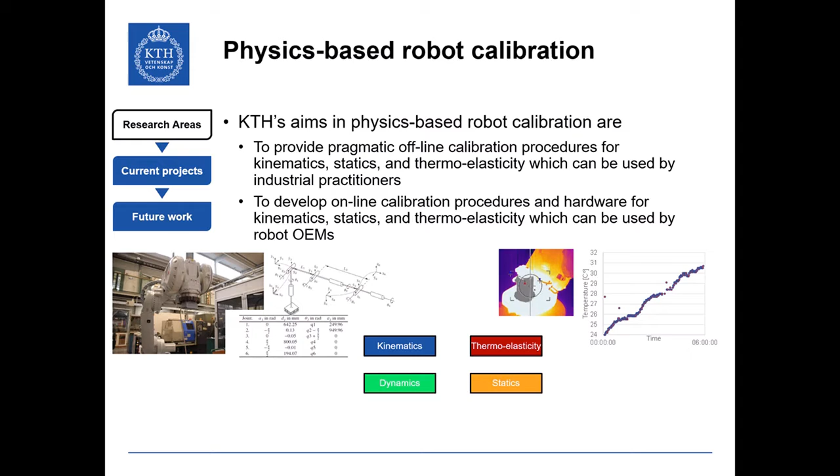Then there's thermoelasticity, the study of how aspects such as kinematics, statics, and dynamics change as a function of temperature. The picture on the right-hand side shows how we have visualized the temperature gradients and measured the temperature of a certain link of the industrial manipulator, in order to compensate the kinematic parameters of the manipulator for the temperature resulting from its task program.

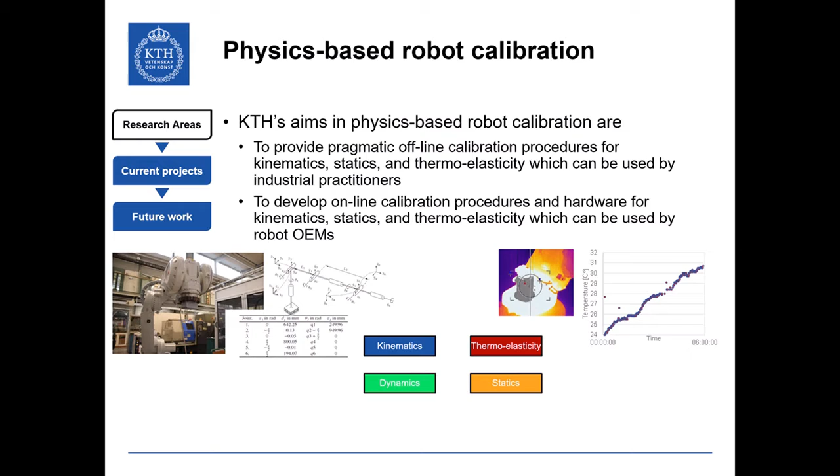Our main focus, though, is the interaction of the industrial manipulator with its environment in static, quasi-static, or dynamic applications. This video shows some of our measurements conducted in 2018 at ABB, and you will see a similar procedure demonstrated by my colleague Monica, which focuses on the calibration of the industrial manipulator's compliance under motion.

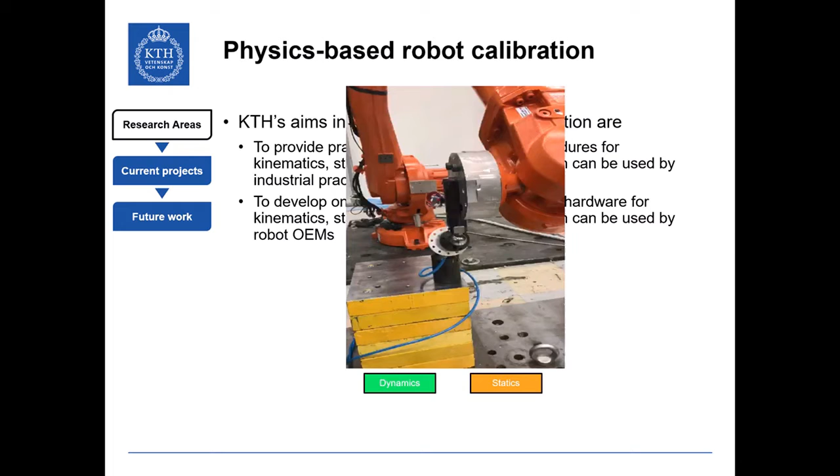Let's turn to the demonstration.

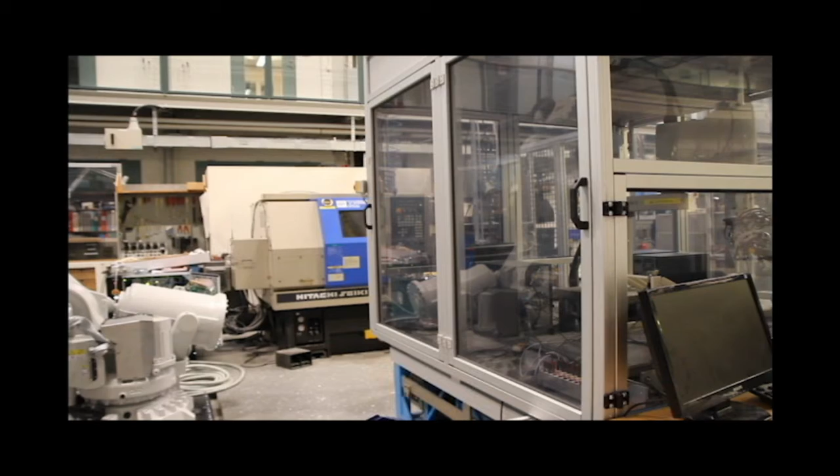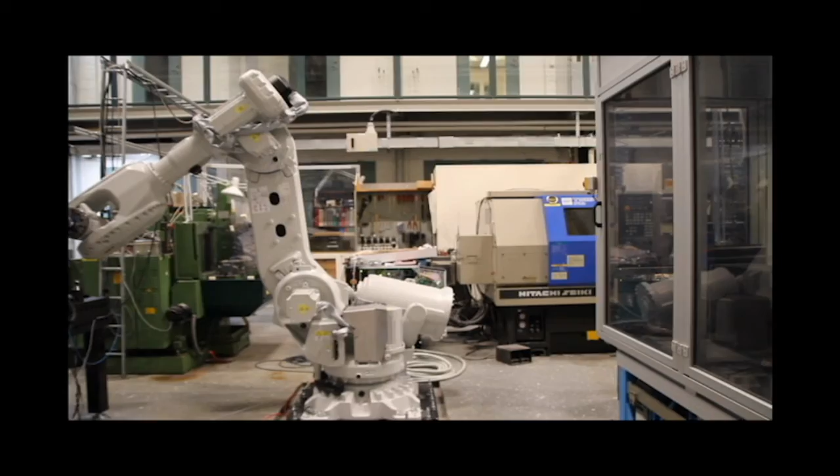This demonstrator is part of an ongoing effort to develop an online compensation algorithm for improving the positioning accuracy of industrial robots in machining operations, where they are subjected to significant loads due to interaction with their environment, while having to maintain tight geometric dimensions and tolerances.

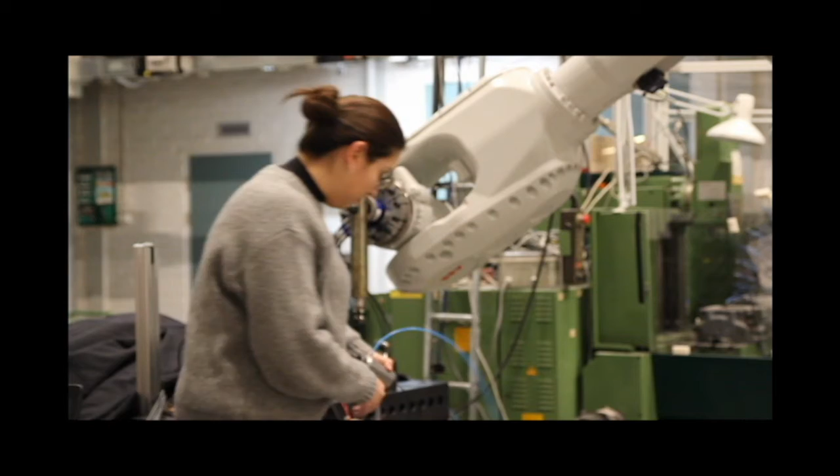The setup presented in this demonstrator is comprised of the robotic system, an IRB 6700 ABB robot with its controller, and the loading system, an LDBB—a loaded double ball bar—a device used in performance evaluation of machine tools with integrated capabilities to apply static loads and measure distances at micrometer accuracy and submicrometer precision.

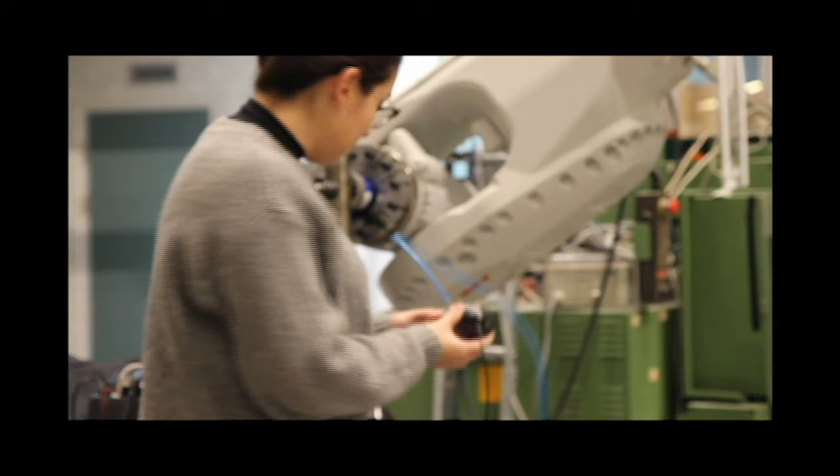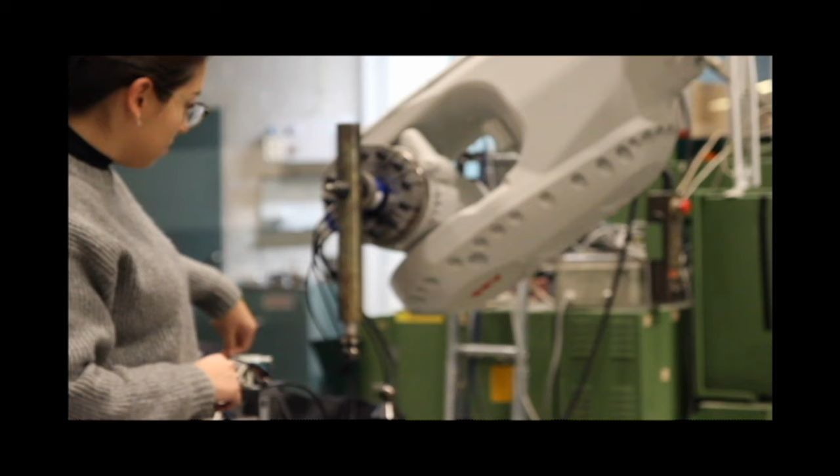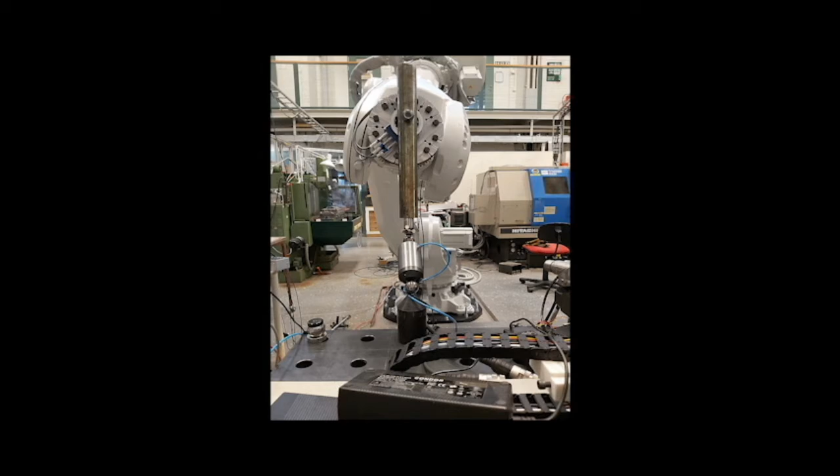The forces are measured using an HPM force-torque sensor mounted on the robot's end effector. An LVDT, embedded in the LDBB, and a Leica AT901 laser tracker are used for validation. Finally, the compensation system collects data from the sensors, performs signal processing, computes the respective compensation that must be applied based on previously identified physical properties of the robot, such as the Denavit-Hartenberg parameters and joint stiffness values, and communicates the values to the robot controller to perform the compensation.

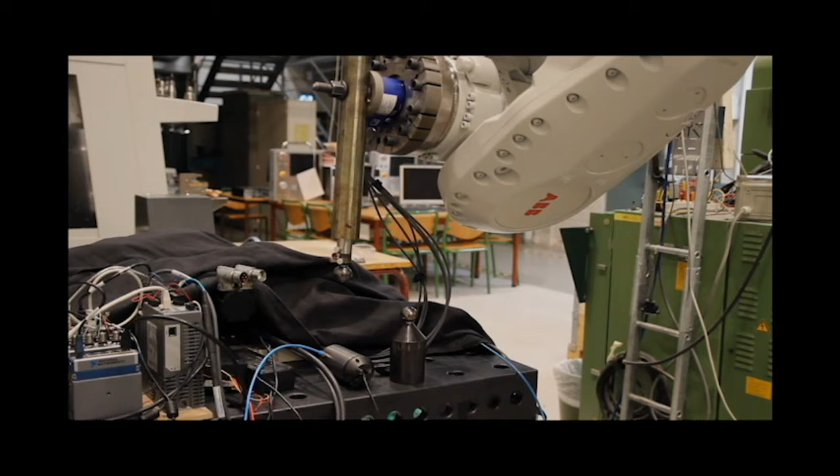For the demonstration of the online compensation strategy, the robot follows a circular low-speed trajectory at 50 millimeters per second to create a so-called quasi-static loaded trajectory.

The experiment measured the path positioning accuracy along the trajectory for an unloaded case, a loaded case, and a compensated case. In the loaded and compensated cases, the placement of the LDBB at an angle with the horizontal XY plane ensures that the robot is loaded in the three Cartesian directions throughout the movement execution.

The approach of a quasi-static trajectory emulates the interaction of forces during movement in the actual machining process. Now, let's see the compensation in action.

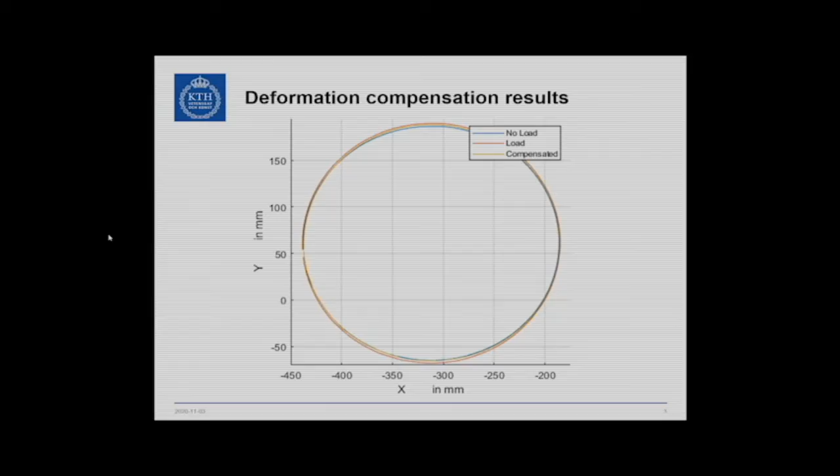Currently, we are still working on improving the compensation to achieve a 250 micrometer target, reducing the processing time and synchronization of the algorithm, as well as considering the influence of different variables in the quasi-static stiffness identification and overall compensation performance. Current projects.

COMACH, Clean, Precise and Defect-Free Composite Parts Machining Robot. The COMACH project answers the needs of composite part manufacturers to increase the competitiveness of the industry by proposing the development of a cost-effective and flexible robotic solution for machining composite parts, including an internal dust suction system for improved health and safety conditions, reduced energy consumption, increased precision, and continuous process monitoring for right-first-time machining.

The main objective of the project is to enable the machining of carbon fiber composite materials by industrial manipulators in the aerospace, automotive, and energy provision industries.

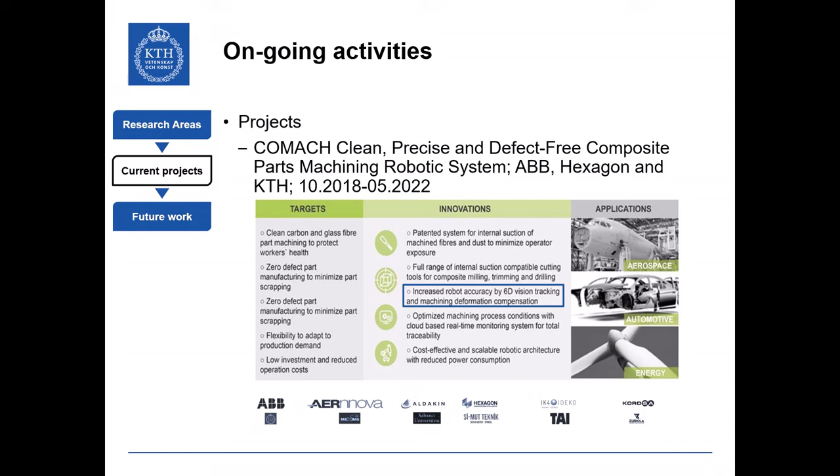The Swedish partners, that is ABB, Hexagon, and KTH, focus on two main goals: to improve positioning accuracy through quasi-static manipulator calibration, and to create design knowledge for industrial manipulators in contact applications.

Telesurgical robotic systems allow surgeons to perform surgical operations from remote locations with enhanced comfort, dexterity, and accuracy. They are capable of assisting in a wide range of surgeries such as orthopedic, gynecologic, cardiothoracic, and general surgery, with applications including laparoscopic procedures, eye surgery, and fracture manipulation.

Cost reduction has great potential for future research in that field. One potential cost reduction comes from economies of scale through the application of off-the-shelf industrial manipulators.

For the repositioning of bone fractures, KTH and Tokyo University would like to exploit physics-based calibration of industrial manipulators in combination with online and offline compensation to improve positioning accuracy.

In addition, Tokyo University and KTH would like to review the development of positioning accuracy of industrial manipulators to assess the feasibility of their application for different areas of surgery.

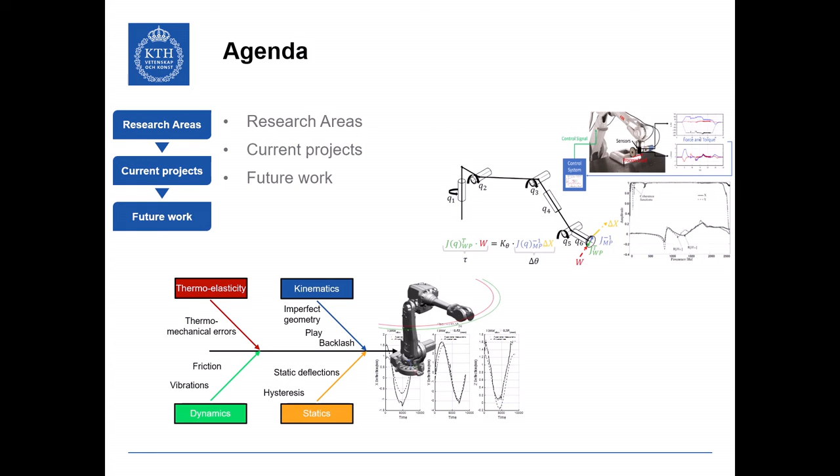And as always, we would like to end on the note of perhaps the most fundamental question one can ask about a robot: where is it? Thank you very much.